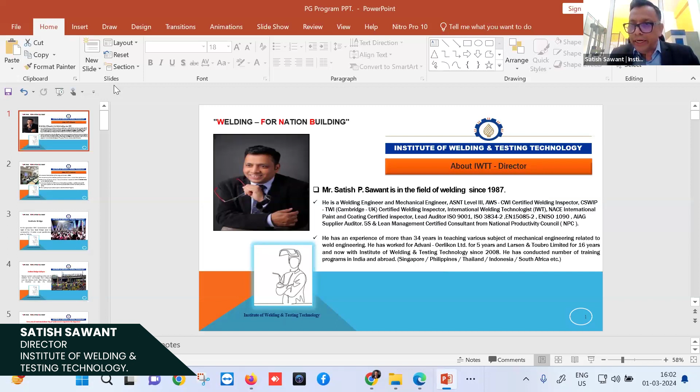Myself, Satish Sawant, I'm a mechanical engineer. I'm an ASNT Level 3, AWS CWI certified welding inspector. I had done Cambridge from the TWI CSWIP examination. I'm an international welding technologist and NACE certified paint and coating inspector. And I'm an auditor for ISO 3834, EN 15085, EN 1090, PED, and lean management.

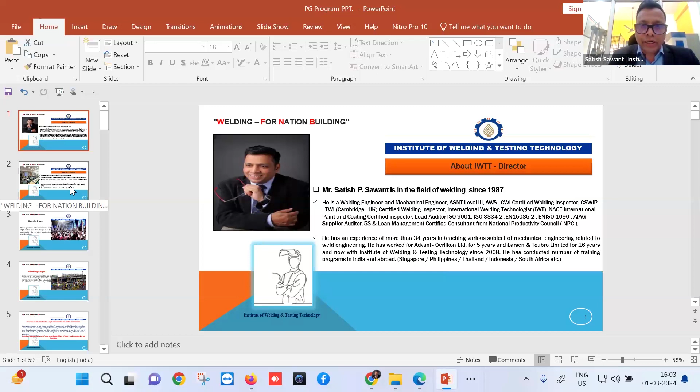Specifically, I had done several programs for lean management in welding, to find out the 7 wastes from welding and how welding can be done in a better, more cost-effective way for industries. So today, when we're talking about sustainability, we'll discuss a few incidents which have happened.

I'm representing Institute of Welding and Testing Technology, which was founded in 2004. Our vision is to develop champions to build for the nations. With that vision, we started this institute. The institute is ISO 9001 certified, with accreditation for 17025 also for their laboratories. And the institute is now certifying for the AWS CWI programs in Mumbai. So we designed a tailor-made program for the customers also.

Recently, if you look at yesterday's news, I thought I could start with this. This Gokhale Bridge, which has been inaugurated yesterday, was found that the bridge height is not specified as per requirement. The railway rules and regulations - the Times of India news says the BMC has inaugurated it and the 1.5 meter specification given by railway has not been followed. Now, understanding the specification, codes and standards is very, very important.

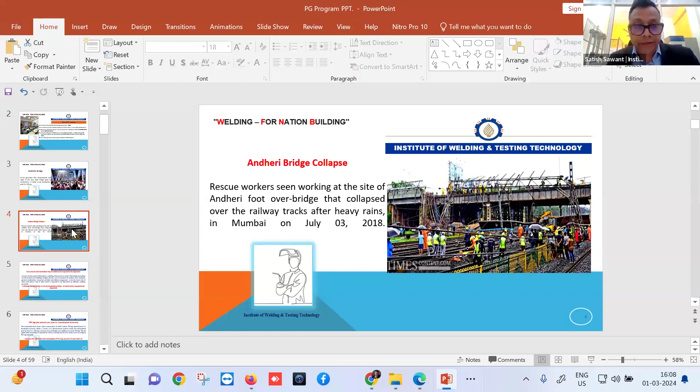Now let us understand the infrastructure requirement in India and abroad. Every ton of steel used requires 5 kgs of weld metal to be deposited. The major process in fabrication is welding, and whether it's bridges, cars, locomotives, ships, or defense, a lot of welding is done everywhere. For this, we need proper equipment, proper welding consumables, and proper manpower.

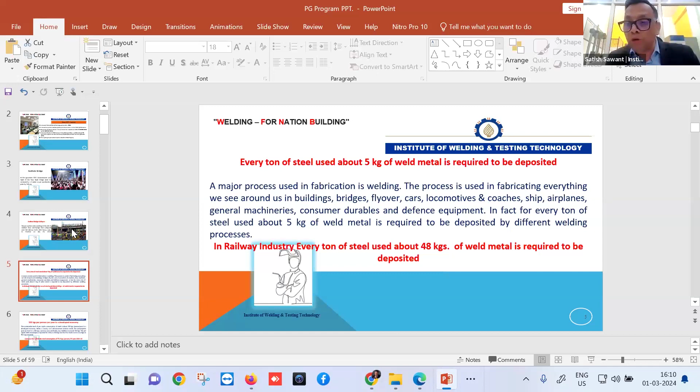In the railway industry, for example, we need around 48 kgs of weld metal for 1 ton of steel used, compared to the general statement of 5 kgs of weld metal deposition. In shipbuilding, the figure is even more attractive - for 1 ton of steel, you need 51 kgs of weld metal. So it depends upon the industry. The deposition rate increases and we need to go for more deposition of welding consumables.

Now this is the statistics data given - what is the Indian requirement in the upcoming future? Generally, if we look at developed countries, the sustainable per capita consumption of steel is 233 kgs. When any country goes into infrastructure creation mode, steel consumption can even go up to 1000 kgs per capita, and then it may sustain around 300 kgs.

Now some examples - if you look at China, today's per capita consumption is around 220 kgs, whereas South Korea is 950 kgs. Comparative to India - I took this data this morning only - last year our consumption was 63 kgs, and it has gone up to 77.2 kgs per capita consumption.

Now, if you look at this, per capita consumption of steel is increasing, but it is not meeting the requirement of the world market. And when we reach that level of steel consumption, the question comes - do you have the capability to sustain this, which is very, very important.

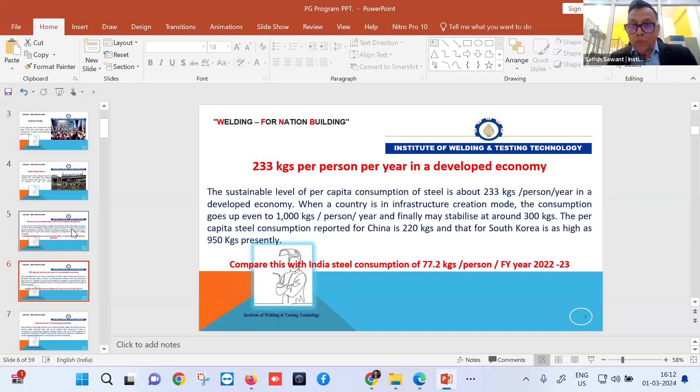For sustainability, what do we need to do? We need to have good equipment, because India needs to produce world-class steel required for infrastructure. Today also, we are getting imported steel in many places for infrastructure creation - we don't have enough quality steel available in India to meet our requirement. So start with making steels, then welding machines, then welding consumables. We can buy machines, but we cannot buy manpower.

There is advancement in technology happening. Robotics is taking place very smoothly in India, and young engineers are getting more motivated to go toward fabrication with automation. New material handling systems are being developed, and most important, we are able to produce some quality steels in India also. There are special alloys too, and if you look at the railway industry, they are more focused on making the total body with aluminum.

Now, aluminum welding - there is a huge requirement coming in the future for aluminum fabrication and infrastructure creation. When e-vehicles come, there will again be a requirement for aluminum welding. Then if you go to low alloy steel, high strength material is another area. Defense requires some critical materials, which are also coming up from our Indian suppliers to meet the requirement.

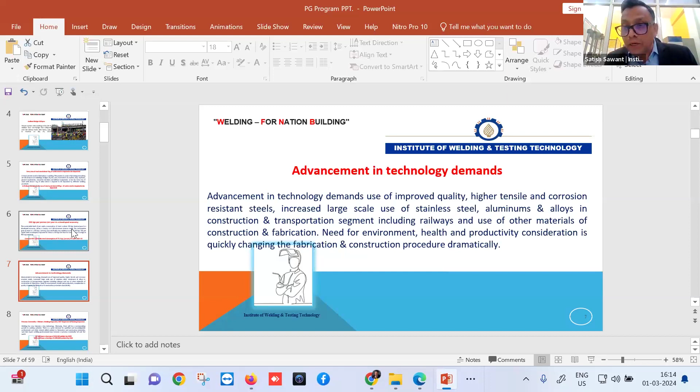So there is a lot of advancement coming. Inverter converter technology is helping us, but more than that, we need total infrastructure creation mode to be worked out. Looking at the advancement in technology, you need that kind of people to also perform the job - those conventional welding practices will not work. A small amount of steel consumption is happening in India - we're better than last year, but not better than what the world requirement is.

Looking at these precious commodities, welders, welding inspectors, NDT inspectors, and painting inspectors will be in huge demand in the market, because as we go for infrastructure creation mode, we need to work on qualifying and meeting the requirement of welders, welding operators, and robotic operators.

Now the US itself is looking at India, the Middle East is looking at India to provide welders to them. Europe is looking at us to provide skilled manpower. But looking at it the right way, India itself is facing a problem getting welders - most helpers are getting converted to welders. We don't have an appropriate infrastructure to create welders.

Welders training is a big challenge because the consumption of steel, electricity, and gases is required. It is not like other training programs where IT people sit on a computer and create. Here, when we have to create welders, the investment required is too high. So there is a huge demand for welders in India as well as abroad. When India moves forward with infrastructure in a bigger way, we may require 22 lakh welders in India.

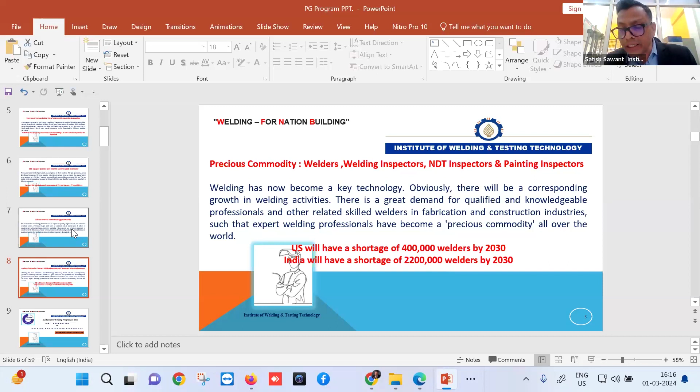To create these welders for India and abroad, we need to find a solution. For the sustainability of the welding process and infrastructure creation, the Institute has taken a small initiative to create a post-graduation program in welding and fabrication technology. It is a need-based requirement, because regarding welder qualification and procedure qualification, I have seen in industries that people do fabrication, send it abroad, and the material comes back, where they pay huge losses in making those things in India, because we don't have even good engineers to understand the fabrication process. So it is a need base for the sustainability.

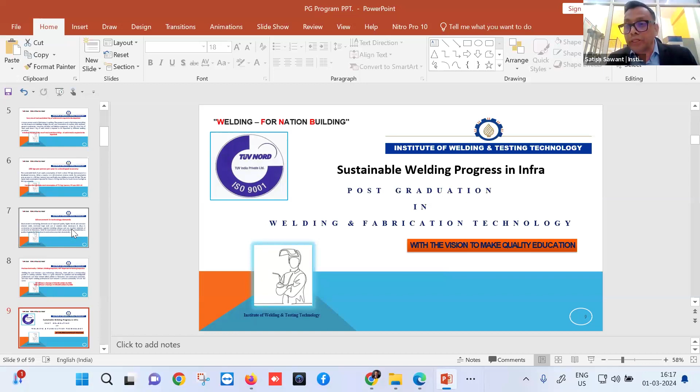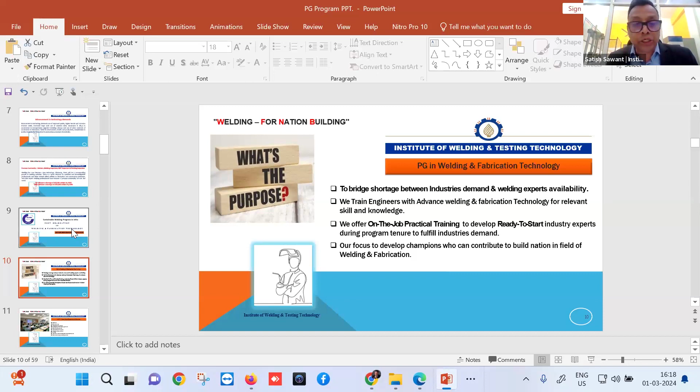The Institute is planning to contribute by creating skilled manpower to avoid accidents in the coming future. This PG program, launched after graduation, allows people to join, and even diploma holders can join this program. There is no bar put for the PG program. The reason behind that is we want more and more people to get benefited. Even working people can do this part-time program and add a feather in their cap, giving them more practical training, covering not only welding but also NDT and DT as an added feature.

Painting technology is also added as a feather in this fabrication technology for sustenance. It will be helpful for defense, shipbuilding, petrochemicals, oil and gas, and those who want to make their career in infrastructure creation in all these branches will be benefited, and we can avoid many kinds of accidents in the coming future caused by ignorance.

Generally, accidents occur because of carelessness, overconfidence, and ignorance. Most fabricators are overconfident, saying they have been doing fabrication for so many years and feel that whatever way they are doing it is the right way. But the result will not come immediately. If we look at this, when we are working for defense, shipbuilding, petrochemicals, we can avoid this kind of accident.

The Ministry of Defense has allocated around 6.2 lakh crore rupees for defense. The Ministry of Transport has added 2.78 lakh crore rupees for the ministry. Even the railway - there is a lot of investment coming for infrastructure creation. So we need to work on this.

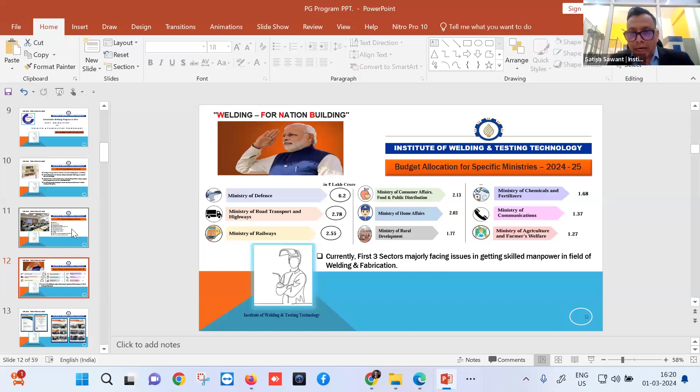I'm taking this a little bit ahead, so we can avoid this kind of accident in the upcoming future. These are all photos taken in India, not to scare you, but this is a need for the infrastructure creation we're doing. We need to build good manpower to produce better infrastructure creations.

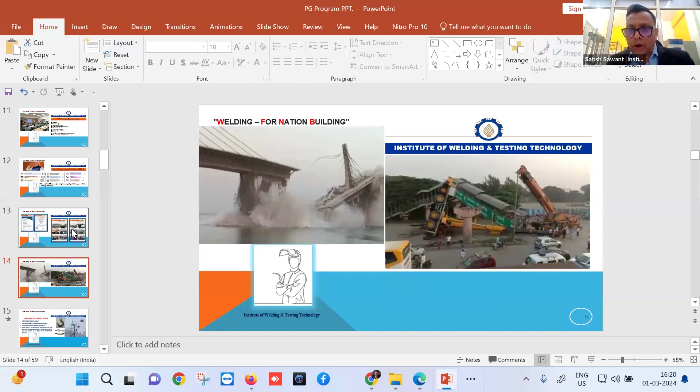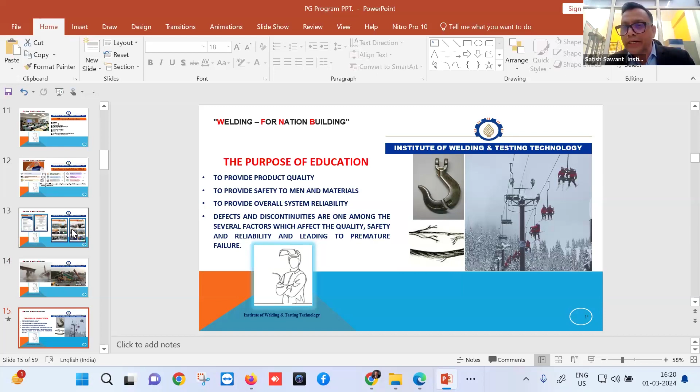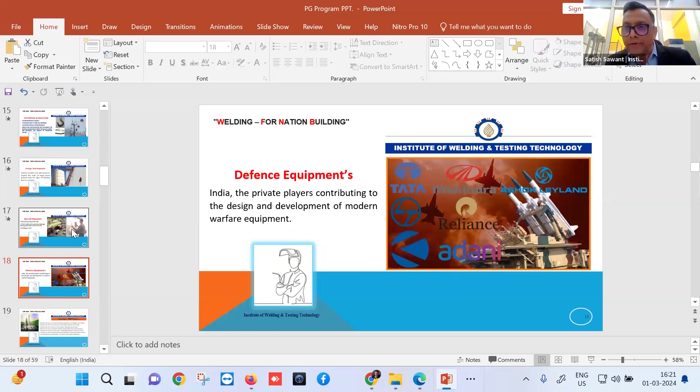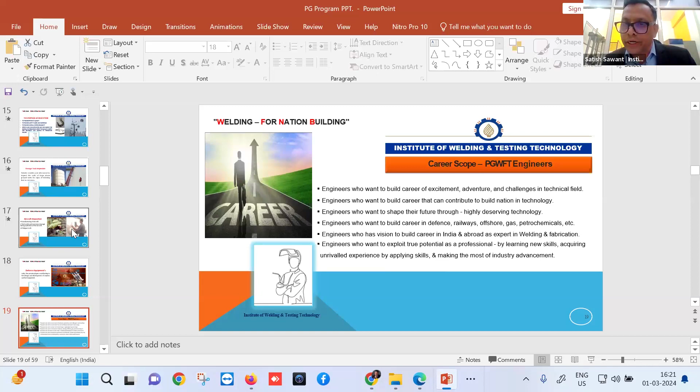Now, some examples have been given here. A lot of ropeways have been made, and there is a lot of inspection and infrastructure creation where the quality of ropeways needs to be checked, and for that also the tank fabrications. Then the aircraft industry is coming up, and defense also has a lot of requirement for qualified welding engineers, and we already have a tie-up with them. Even if anyone is looking for employment, we can help them get employment in India and abroad, as well as there is a lot of career scope.

What I feel is that trained manpower is very important. Even if we have world-class machines, if the manpower has not been trained, they may not be able to use it. You may be having an iPhone, but if you don't know how to use the iPhone, then using it only becomes a style statement. It may not really give the benefit of the iPhone to us. So creating good manpower along with equipment and material, everything is important. So I thought I could focus more on educating more and more people in welding and fabrication technology.